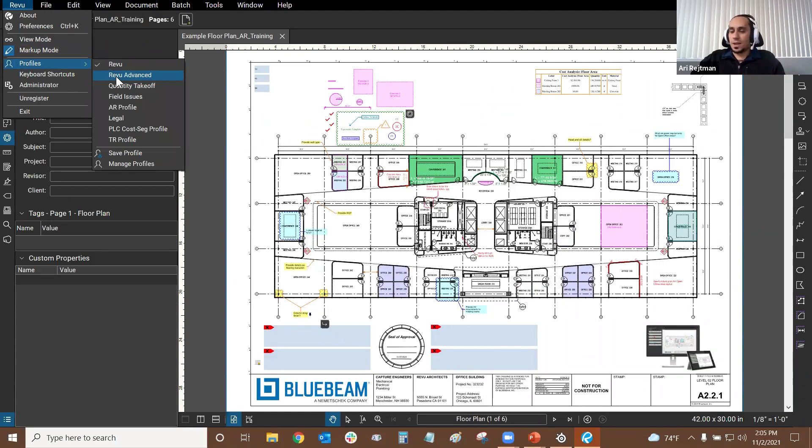We're going to go to the Revu dropdown, mouse over Profiles, and switch to Revu Advanced. If you're following along today, you can switch to this profile too, and we're going to make a copy of it right now because it's a great starting point for maximizing efficiency and improving your workflow. As you can see, just like my personal profile, this splits our functions, and we have some tools at the top of the screen.

I'm now going to recommend a few tools and show you how to customize them, especially by adding the Save As button right next to Save, up in the upper left. It's not there by default, so let's get our button for that.

Two ways we can turn tools on or off: one is to right-click next to an existing group of tools, such as these up here, and we see this list of tools. What I have turned on here is what I recommend. If you're going to be digitally signing and sealing documents, you can turn on digital signature, although it's not necessary. The rest of these are very important, including these four right here with document up to file. You can turn on or off certain tools you don't need, but most of these are very useful for almost everybody, so that should help you guys out a lot.

Now there are three toolbars missing here, and we can find them by going to the Tools dropdown, mousing over Toolbars, and now we see these three toolbars. The one that's not turned on by default that I recommend everybody turn on and leave on is the status bar. It'll provide you with buttons you can toggle on or off, giving you so much more functionality that the program provides, so you guys can turn that on.

While we're here, we have Customize at the bottom, so I'll click on that, and here's where I can add the Save As button. All I need to do is start from the upper left and work my way like a snake, you could say. So we're going to start here with Categories, and make sure File is selected, because Save As is found under the File category. The commands for File are all here, and here is Save As.

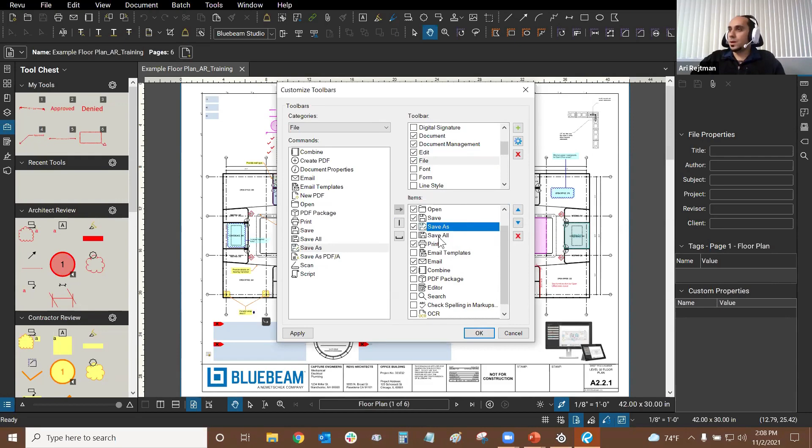Now all of the items I've turned on in my profile for file are found under items. I'll click Save As on the left side, click the arrow, select Save As, and use the blue arrows to move it up, right below Save. Now I have both, and if I wanted, I could also turn on Save All. That's how you customize it. I'll click OK, and there it is—I now have a floppy disk with a pencil icon.

So I can always save local copies if I'm working in studio projects or sessions when I need to. Excellent, that's the first step to customize this.

You can also move these groups of tools by clicking on the vertical white dots to the left of every group. Here's the one for this group, so I can move it left, right, or down. It's very flexible—I could even move it outside the toolbar area and have it floating if needed, which usually makes it more flexible, although right now it isn't moving out for some reason.

I know the side panels can definitely float. If I wanted properties on another screen, I'd just drag it out here, and now I have it floating like this. Although I like to keep track of my panels, so I keep them all on my screen. All right, now our interface is nearly done.

Let's turn on some preferences, and then I'll show you guys how the status bar works. So we go to our settings by going to the Revu dropdown and clicking on Preferences.

Starting from General at the top, having options highlighted, everything here is fine. Just so you know, you can change your theme—if the dark theme is too dark, you can always change it to the light one.

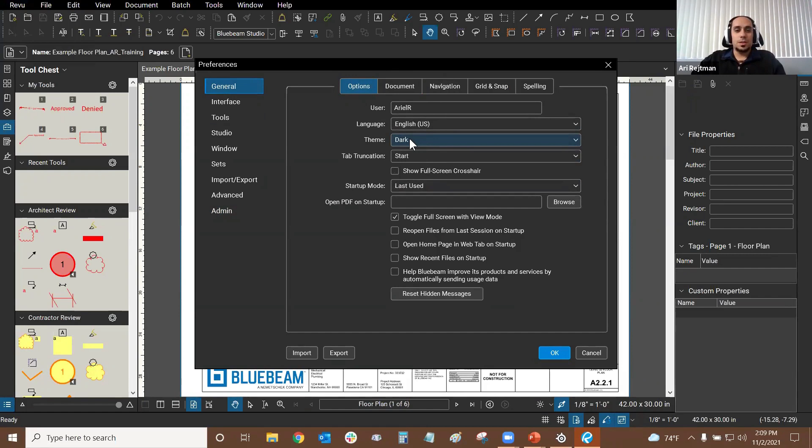I'd recommend everybody goes to Navigation and changes their sensitivity from 4 to either 3 or 2. That way you can scroll forward or back a little less each time, so you can center yourself on your screen more accurately. Having it at 4 seems too drastic—I set mine to 2 because I'm a little bit crazy.

Then if we go to Grid and Snap, you all might find this useful as contractors—you can change your grid spacing right here. This is very helpful when you turn on the grid, and you can turn on snap to grid, so you can snap to different parts of it, which I'll demonstrate when we get to the status bar. Here's where you change grid spacing along with other snaps you can turn on or off.

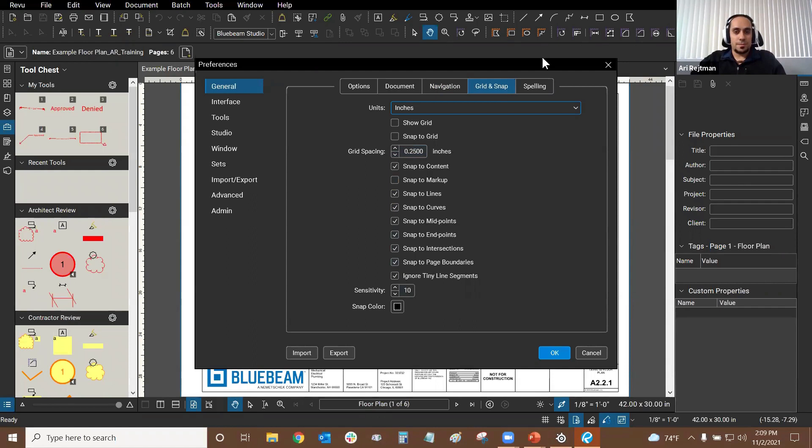Then if we go to Tools, we have two options that should always be on: reuse tools, and auto size text box and callout markups. We'll see how they work very soon when I get to the status bar, and we'll see how auto-size text box and callout markups works when I create a text box for you guys. They're really useful and will save you a lot of time.

Moving on, if you go to Studio and Servers, you can actually change your display name right here. All you have to do is sign in first, and then your display name will be here, and you can modify it if you ever need to. We're going to get into Studio in our third week, so I'll just make some quick comments about it here and there today.

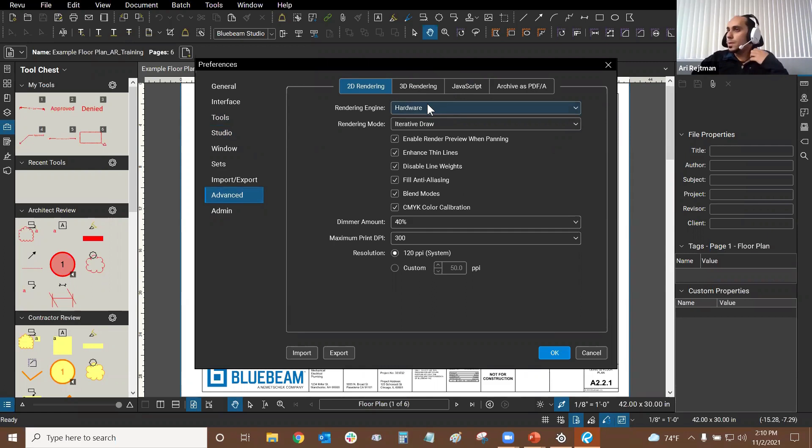Moving on, if we go to Advanced, if you're ever having bugs with the software, if you're not able to open a PDF, or if you're having color issues visually, you can change your rendering engine from hardware to software.

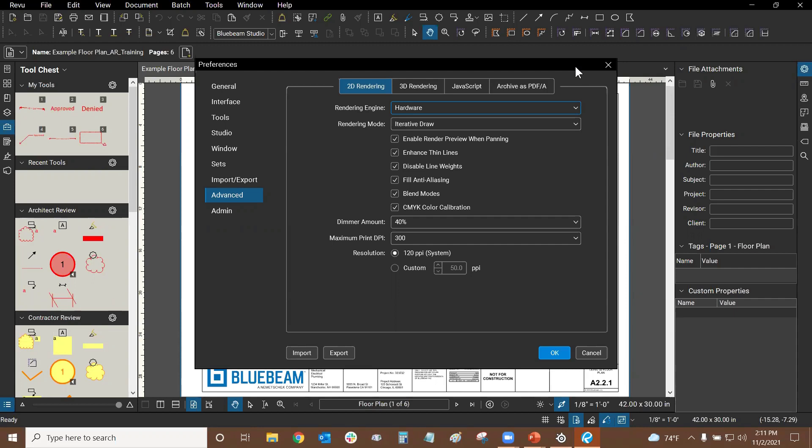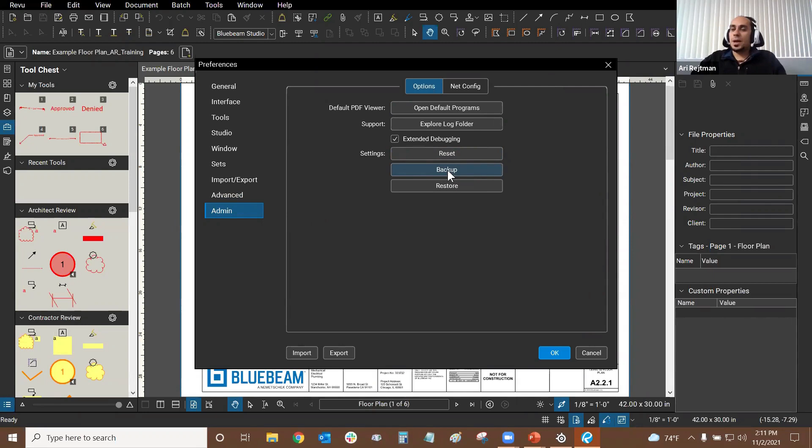When we're done with our settings, we'll click OK. Let me show you guys how you can share your profile with your colleagues very easily. Let's go back to Revu and Profiles, then Manage Profiles down here. Here's where I can make a brand new profile. Now that the Revu Advanced profile is my current profile, I can click on Add and create a brand new one. I'm not going to do that because I already have my profile, but now you guys know.

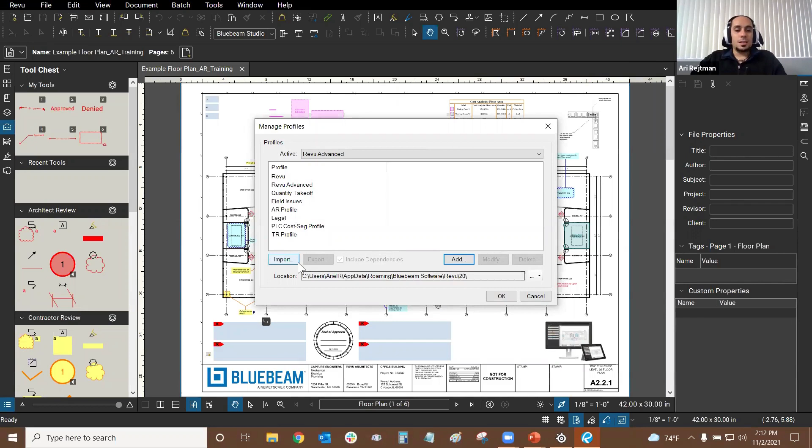The import and export buttons are here. So if I wanted to share my profile, I would select it in the list and click on Export. It's a small little .bpx file, really nice. You can put it on a USB drive, send it to yourself in an email. It's very small and handy to have.

All right, let me swap back to my profile. I'll just go to Revu, Profiles, and AR Profile. There it is, perfect. My profile is the same, like I mentioned. I just have all the tools turned on for visibility purposes.

Now besides profiles, let me show you guys a few other things. I want to talk about the status bar really quickly. Let me just go back to our PowerPoint really quick. Yep, interface customization and then comparisons. Good, I'm on track.

So the status bar, it's this bar all the way at the bottom of our screen. We can see the word 'ready' down here. And if I swap to another function, such as the highlight tool, it gives us some instructions on how to use the tool. So if you don't know how to use something, and this is your first time, select it and look on the bottom left. As long as the status bar is open, you'll see this text.

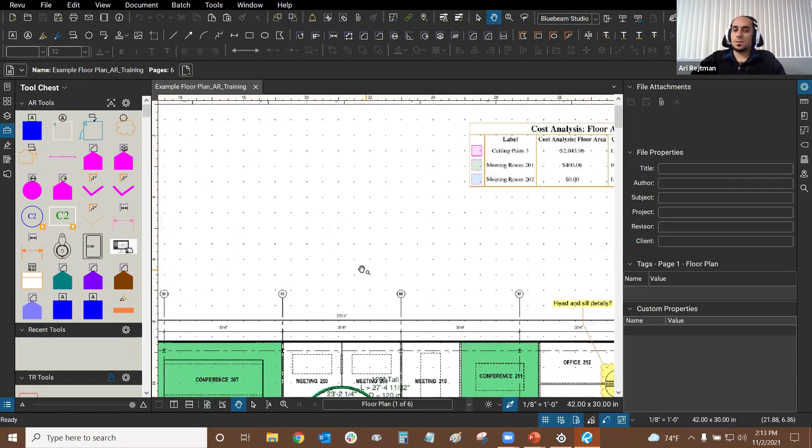Moving to the right of that text, we have Show Grid and Snap to Grid. Just like I mentioned earlier, we can turn that on. We have all these dots, and then we can snap to it here. So if you need to use a specific grid, you can change your grid spacing and preferences like I showed you, and then turn your grid on and snap to it as well.

For example, if I use a line right now and click next to one of these dots, I can draw from it to the other dots and snap perfectly. So it's quite convenient. Now I'm going to turn that off for today's presentation.

The third button here, I recommend that everybody turns on and uses most of the time. It's called Snap to Content. We're dealing with a PDF that came from CAD, and there are PDFs that come from BIM programs, Microsoft Word, PowerPoint, Excel, and all of them create vector data. Vector data is smart data. As I zoom in on any vector data, it keeps refreshing itself, so it looks really crisp and clear no matter what. So this is all vector data here, all the lines that exist on this page.

So I can actually use the line tool, and I can move my mouse on top of this data, and I can see a nice little box here. This box simulates some of the snaps that you're familiar with if you use programs like AutoCAD. For example, when the box is white, this is like the nearest snap. When the box turns blue, it's using a specific snap.

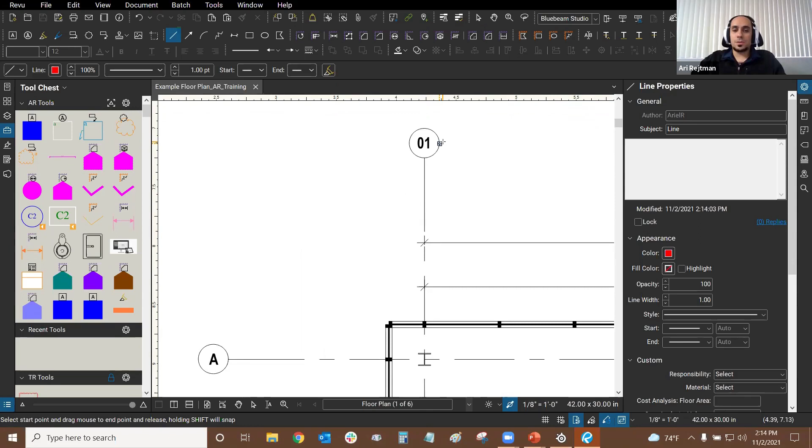So if I'm in the middle of a line, it's the midpoint. The end of a line is an endpoint. When it comes to circles, we have all 4 quadrants, and we also have intersections. So not as many snaps as you're familiar with in CAD, but close enough, and most of the ones that are very important for us when it comes to our markups and drawing in Revu.

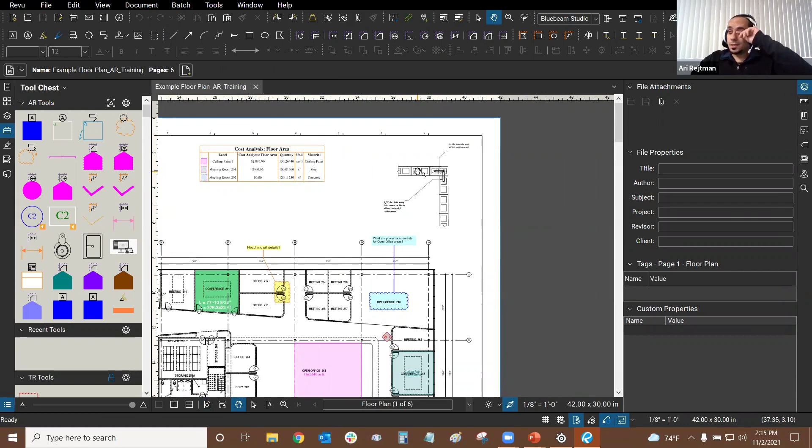All right, so that's how Snap to Content works. And the opposite of vector data is raster data, and that data is like an image or a scan. So anything that you put on a scanner bed becomes raster data immediately, even if it was originally a vector data drawing of a building or a site, for example.

So as I zoom in on raster data, it becomes a bit more pixelated and never really refreshes itself. This image right here is a good example of raster data, along with this image here. As I zoom in on it, it's very, very pixelated. So this is all raster data.

And we can't really snap to raster data, but you can still calibrate, and you'll have to guess as much as you can and be as close as possible to calibrating accurately. With vector data, you just snap, so the calibrations are almost always perfect.

All right, so that's basically our interface, and we've turned on our status bar, which is great. Let me explain the last few buttons in the status bar before we go into comparisons and overlays.

The fourth one allows us to snap to markup. So just like snap to content, I can now draw from the corner of a markup to the middle of one, for example. The issue with snap to markup is that there are all of these little guidelines here, so Revu wants to draw in relation to other markups. So I don't recommend that you leave it on at all times. I have it off most of the time, and I turn it on whenever I need it.

The fifth one is reuse markup tools. Like I mentioned in preferences, it's great to have this on because now when I draw a line up here, I can keep drawing over and over again. If I had this turned off, Revu would immediately deselect the tool from my cursor, and I'd have to click on the line tool again to make a second and a third one. That takes too long. Now, when I'm done drawing, because I have reuse markup tools turned on, I must press the escape key when I'm done.

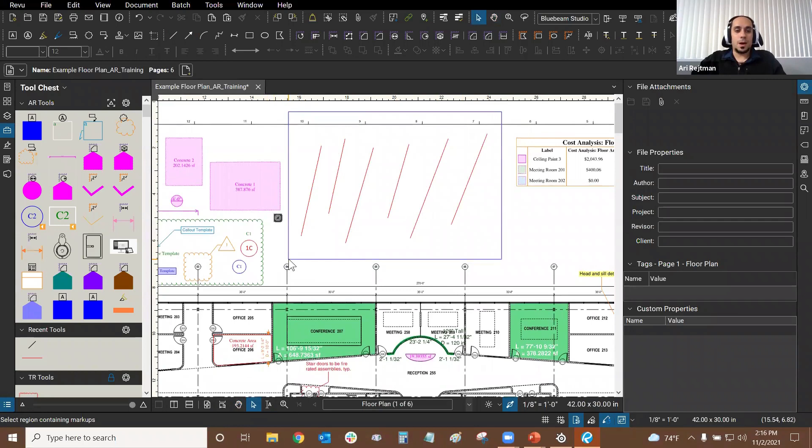If I want to select more than one markup very quickly, I can also use the select tool instead of the pan tool right here. Then I can click and hold to make a nice box around my markups, and then just delete them with the delete key. So there are many different ways to quickly select things, and the reuse markup tools will allow you to get used to using the escape key if you're not familiar with CAD or BIM programs.

Moving on, we have synchronized views, and this is going to help us when we do comparisons and overlays, because we'll be able to see both views moving together if one is zoomed in a particular area. We'll see how that works when I demonstrate comparisons and overlays, which I believe now is a good time for. So comparisons and overlays are really, really cool.

Let me show you our thumbnails list to show you what we're going to be comparing today. We're going to be comparing page 2, which is an old version of this floor plan, with page 3, a slightly newer version, and I also created some markups on it. So we're going to see how comparisons and overlays work with both vector data and markups.

So first we go to document, and then compare documents is right here, and overlay pages is right below it as well. Let's use a comparison first and see if we have enough information in the comparison to give a final consensus on what changed exactly.

So I'm going to click on compare documents. Here I'm going to make sure I'm using the correct file. Yep, that's the right one. I'm going to change my pages. I'll just click once and then type the number 2, because document A will be the old one. And then document B will be using the same PDF set, but this time it'll be page 3.

Now, if you're comparing two separate documents, then if you have both of them open, Revu will place document A and B in their order that they were opened.

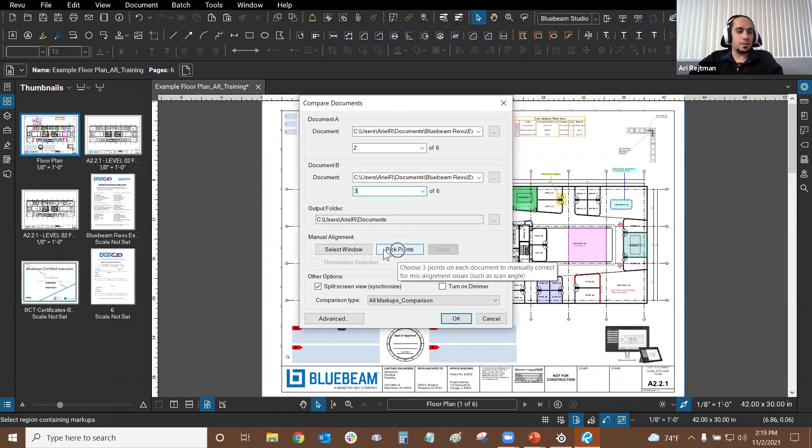Now we can go to advanced down here, and we can see different kinds of settings for our comparisons. We can create essentially four major kinds of comparisons: we can include markups, we can include flattened markups, we can include either or neither. And so that's why up here I have these four comparisons that I created myself. I usually just use the all markups one.

So it includes everything. If you're here and following along, you can change your DPI, or dots per inch, to 144 instead of 72. It'll make your comparisons a little cleaner and more accurate.

And down here, if you ever need to change certain information about the comparison, for example, what PDF the comparison will be created from: in this case, it'll be a new copy of document B, so a new copy of the new floor plan. We'll have all our clouds there, and the file name will be the same as our original, but with _diff at the end. We're going to make a brand new PDF.

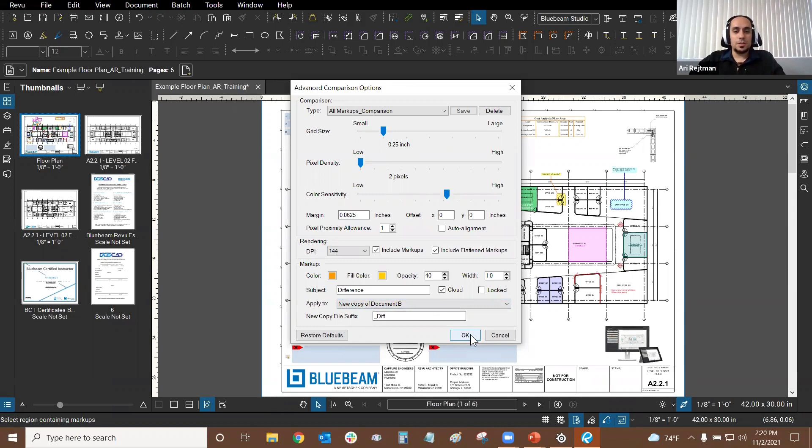So our settings look good. We can click OK, and then I'll click OK again. Once our settings are done, we literally just go to comparison, make sure our pages are correct, click OK, and the comparison takes seconds to make. Now we can see the comparison here on the left side.

So let's see what we can do with this comparison. On the right side, I'm going to choose page 2, because on the left side we have a copy of page 3. Now when I zoom in here, we can see some of the differences without having to use an overlay. For example, it's pretty obvious that a door was added in the new version of this PDF. So that's good to know, and that's what this revision cloud is referring to.

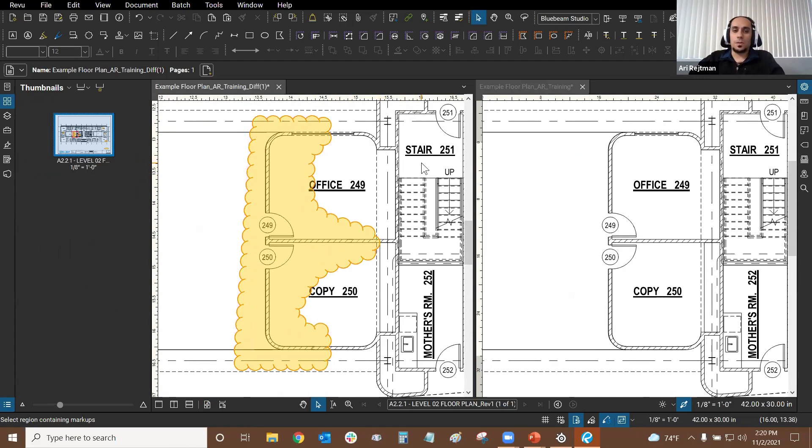Now, if we pan over here to these two offices, it's a little bit unclear exactly what happened with them. So the comparison doesn't exactly give us all the info we need. Let's use an overlay to confirm our assumptions.

So we can go to the document dropdown and click on overlay pages. It's also going to pick up on any PDFs that are currently open. An issue with this is that my comparison is open, and I do not want to use the comparison for this, so I'm just going to select it and use the red X to get rid of it.

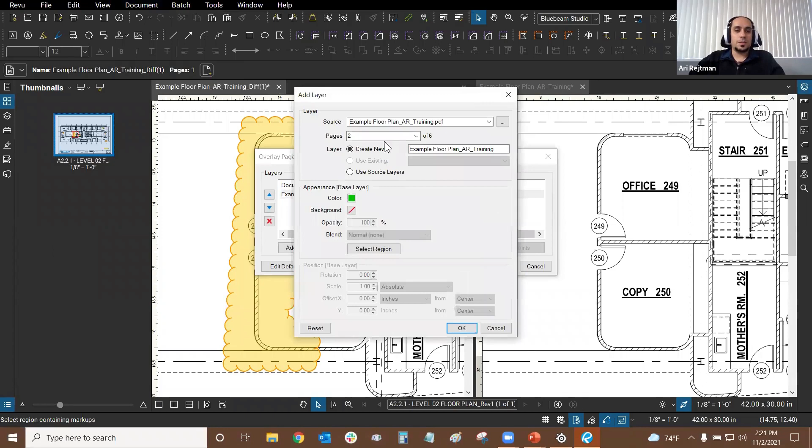Now it's chosen a nice green color, which is the default green, so I just want to change the pages here. I'll double click and change the page to page 3, that way green is new and red will be old. Let's get page 2 up here. We need to click on add in order to add it up there.

Now it still wants us to add the other document, the comparison document, as our second overlay page, and it doesn't even give us the option to use our other document, because overlays tend to be done with two separate PDFs. So instead, I'm just going to click on the square with the three dots and manually find my example floor plan. I believe it is right there, and then I'm just going to choose page 2.

It chose the color red automatically, a nice bright red, and this is a default color—it's this red right here. I recommend that you use the default green and the default red because they really work well together with overlays.

So now that I have them, I'll just reorder them so I can visually understand what I'm overlaying. I'll select this one and use the arrow. So now I have the old floor plan, it's red, it's page 2, and the new one is green, it's page 3.

Before we say OK and initiate the overlay, let's look at some settings we can change by clicking on Edit Defaults. You can change the different colors used automatically with overlays. So if I had a 3rd or 4th document, I could use blue and cyan as the next colors, for example. Then I can choose my blend here.

I recommend the darken default blend. It's the best one because when red and green are on top of each other in this blend, they make black, so it doesn't look like anything changed. In other blends, it makes them a bit muddy sometimes. So our settings here are fine as they are.

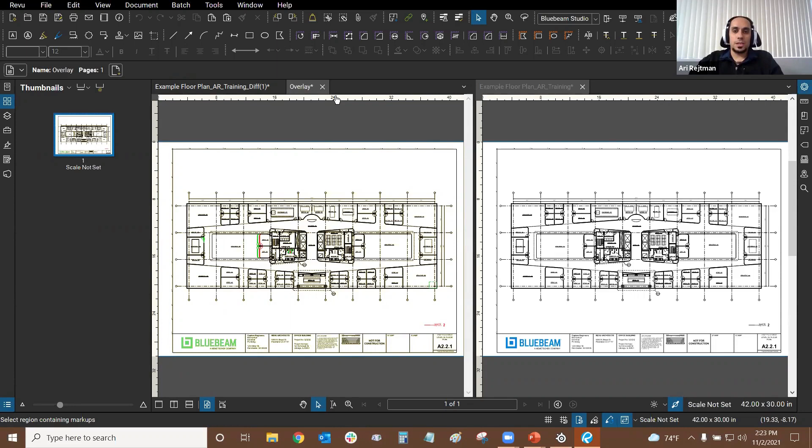All right, perfect. Now I'm just going to use my comparison to navigate. And I have a fun acronym for you guys to use with comparisons and overlays so you can understand their purpose: compare where, overlay what.

Comparisons are like our eyes, and it's very easy to see the revision clouds. So comparisons essentially tell us where something changed. Overlays, on the other hand, tell us what changed. So here we can clearly see that a new door was added and this wall was changed a little bit.

So that's great. Now let's go to those 2 offices and see if the overlay can help us a bit more. Yes, now we can see — if you guys remember the PowerPoint I showed you, I've taken screenshots of these 2 areas, and here they are. So we have our comparison on the left, the overlay on the right, and the overlay clearly tells us the offices got bigger.

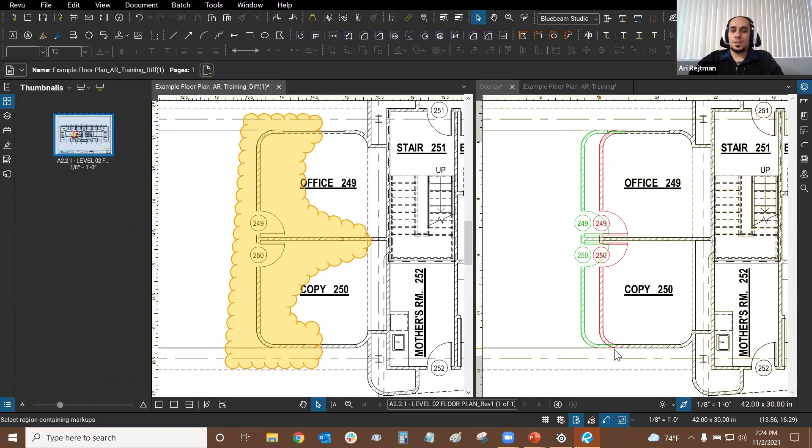So it's much easier to see it with the overlay, but the comparison is nice because it told us there was an issue here. If I was zoomed out, for example, I won't be able to really see all the different changes in the overlay, but with the comparison, I can just see them even if I'm zoomed out like this.

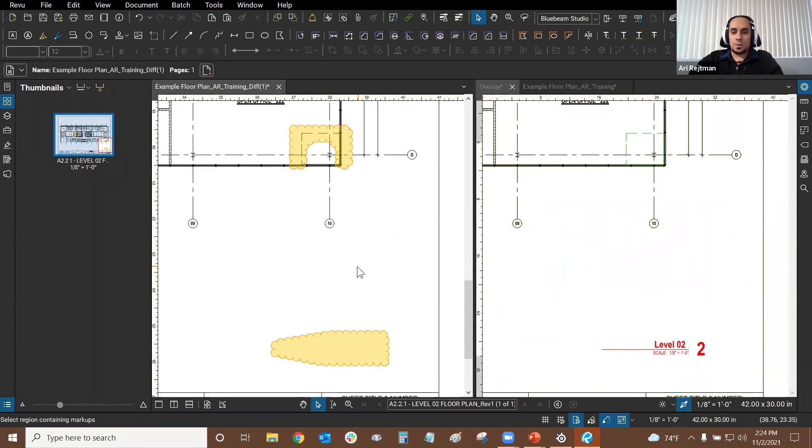For example, the restrooms changed here — we now have 3 stalls instead of 2. Moving on, we have some changes here that were made. This label is gone now, it doesn't exist anymore. And they added some lines here that I think are surrounding this beam.

And let's look at these markups that I created. The comparison found them — it easily made a revision cloud around both of them. But the overlay doesn't even show the markups. So this teaches us that the overlay does not include markups at all, while comparisons are excellent for markups.

So all you need to do to fix that is essentially flatten your markups to the page, and the overlay will pick them up, because anything that's flattened is just like any of these lines that came from CAD or BIM, for example. So flattening is the way if you want to use overlay. Wow, that was a fun little rhyme. Nice. All right, so that's comparisons and overlays.

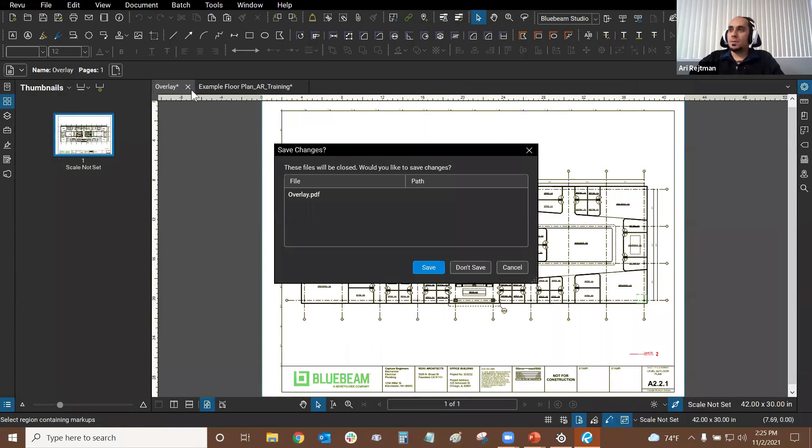Okay, great. So that was comparisons and overlays. Let's go back to our presentation slides. Let's learn about tools, and let me show you where you can find some more of them. So our tool chest, we can access it by clicking on the lunchbox icon right here. And I have all kinds of tools here.

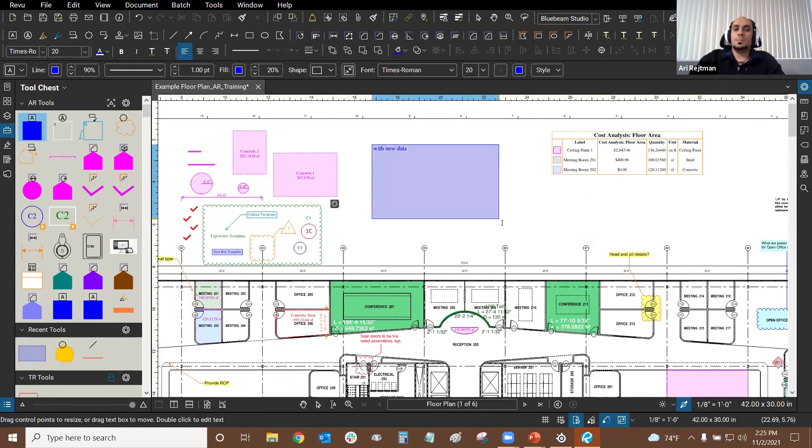I've swapped them into what's called properties mode. So right now, if I use this text box here, I can create a brand new text box with new data, but it still keeps the same blue color and all the other settings associated with it. We can go to properties and see them all right here.

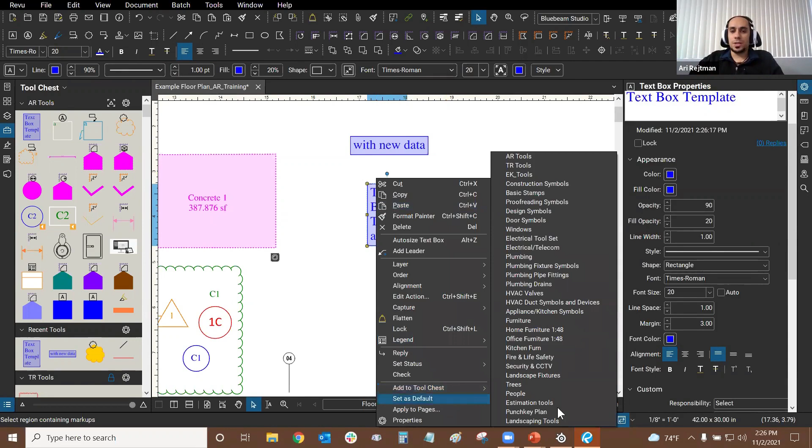But I work with clients who have to write things such as 'approved' or 'please revise' and all kinds of notes. So if you have any kinds of notes like that, you can write them ahead of time, then select your markup, right click on it, mouse over, add to tool chest, and add it to your group of tools.

That way you can have the best of both worlds: an exact word or phrase, and then you double click on your markup and use it in properties mode. So drawing mode is an exact carbon copy, and properties mode uses the properties. That's how we switch our tools.

For example, if I double click on all of my tools up here, I can swap them all into drawing mode. Then if I double click on them again, I can tell which tool I'm using based on the icon above them. So now I can see this is a text box, this is a callout, this is a cloud, and this is the Cloud Plus tool.

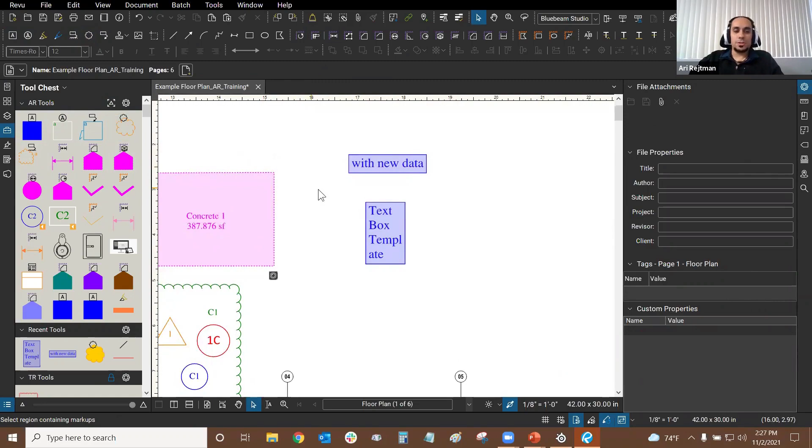That's basically how tools and markups work. I'm not going to go through every single tool today since we have plenty of tutorials and other webinars on that, but I do want to show you some cool things. Firstly, you can turn anything into a tool. I've actually done so with this sink and this toilet.

So how did I do it? Well, I went to these restrooms here and thought, I like these, I want to use them again in the future. So all I need to do is use the Snapshot tool.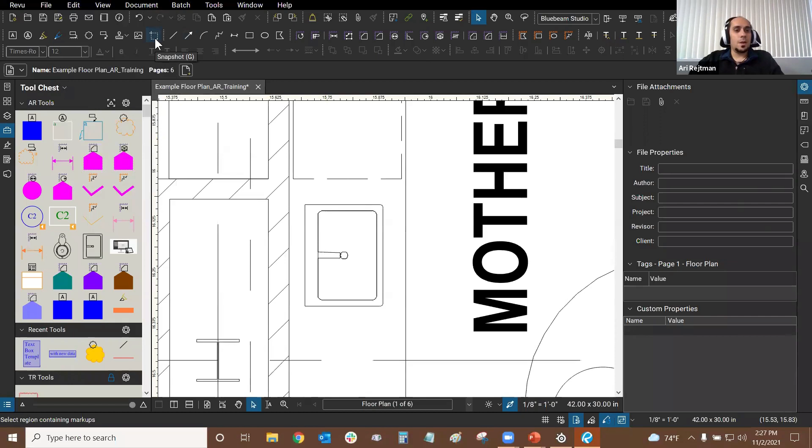I can find it at the top of my screen, and if you don't see it, you can go to Edit and Snapshot is there. You can also press the G key to access it. With Snapshots, I recommend going a little bit outside the object, so I'll go a little outside the sink, make a nice even box around it. The white space isn't too important, but it's still part of the snapshot a little bit.

So now I have it, but I can't click on anything yet because my blue box is still here. So I need to use my keyboard for the next part—I need to copy and paste my snapshot. I'll hold Control and press C, then hold Control and press V, and now my snapshot is pasted right to the upper right of wherever my cursor was. That's why the sink is right here. And there it is, I now have a sink.

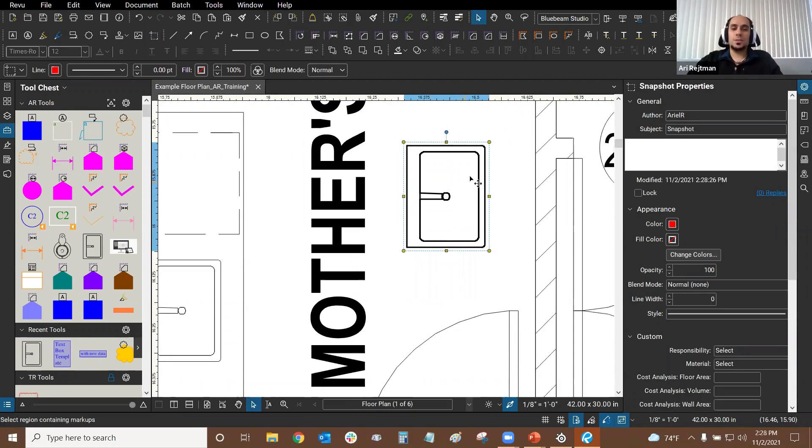Interestingly, while it's a snapshot, it looks like the line weights have turned back on for the sink. I actually didn't mention something I find very cool in this program. You may have noticed that a lot of my line weights in this document are all thin, actually the exact same line weight as each other. But is that the case? Is that how it was created in CAD? Well, no, of course not.

I've actually temporarily turned all my line weights off so I can easily snap to the center of my lines. I can turn them back on by clicking this button right here, Disable Line Weights, and you can find it under the View dropdown all the way at the end.

So I'm just going to click on it, and these are the original line weights of this drawing. So you don't have to go and ask CAD to print you a version without thick line weights if you need both versions. Now you can easily turn them on and off. You can do your measurements very accurately, and I can snap to this intersection here, which I couldn't see before. For example, here it's pretty much blocked, so I had no idea it was even there. And so there you go - that's how you can disable and enable line weights.

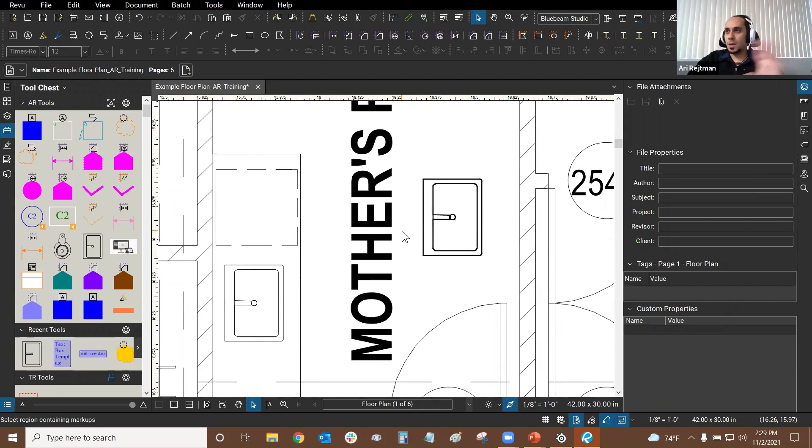I have my line weights almost always disabled most of the time. Some objects and text will act a little bit funky when you turn disable line weights on, so you might want to turn it off and then turn it on when you need it.

Anyway, I now have this snapshot that I created of the sink. Just like any image, I can essentially right click on it and add it to my tool chest - and I've already done so. Here's my sink, and I can use it over and over again. That's a great way to take any objects on a PDF and use them as a tool over and over again in the future, and you can build your tool library by doing so. A lot of people have done that already.

So I'm going to scroll down and show you a lot of tools that I found online. For example, I found some basic stamps and some proofreading symbols that are not really for contractors, but I'm a writer, so I like them. For you guys in particular, we have some doors and windows, some electrical symbols if you need to place certain objects or locate certain things, more electrical telecom symbols, and some plumbing. HVAC is useful - not as much for you all, but still good for you to know it exists. Some furniture, some spacing, some kitchen stuff. Fire life and safety is quite useful - I had a client that specializes in that, so they found these tools and love them. Then we have security and CCTV that we found, along with some landscaping.

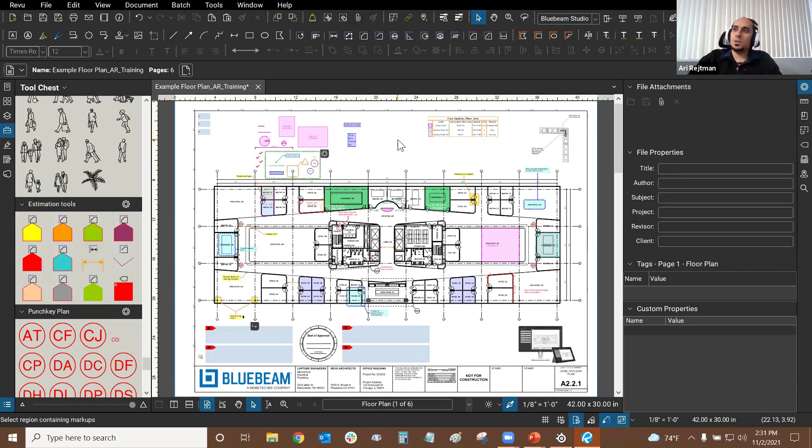This is much more relevant for contractors in your discipline - we have some landscape fixtures, some trees, some people that we can place outside, and of course some lovely estimation tools. These are essentially area tools that have certain materials and certain costs associated with those materials, so when you use them they'll automatically calculate the cost of tile, carpet - this one's another kind of carpet, and we have so many different kinds, and so on and so forth. Here, this one's brick, for example, AstroTurf. So there are many different areas you can create that have different associations, and I'm going to show you guys how that works next week in our quantity takeoffs webinar, because I think that will be quite useful and relevant for all of you.

The last group of tools I found that I think will also be relevant for you all are these punch key little circles. Essentially you can take these and place them on your drawing - I also have some more trees at the end. Now, what if you wanted to make your own? What if we're missing a certain acronym or some letters here? So I can take one of them, place it on my sheet, select it, and make sure that properties is open.

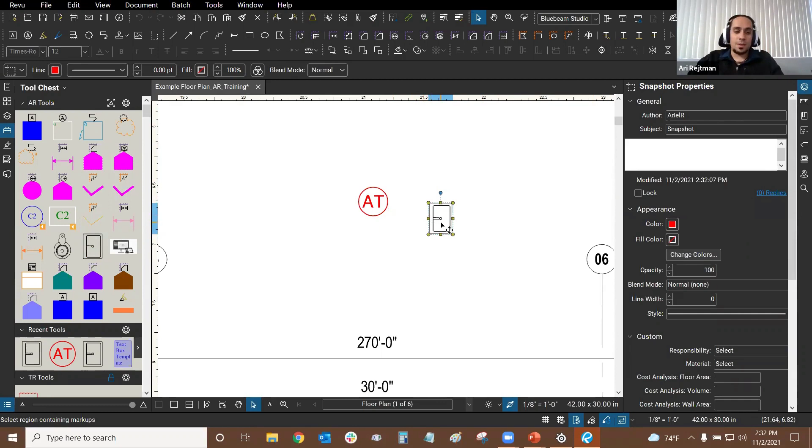Here on top of properties it says group annotation. This is actually a little bit different from that sink I showed you earlier - that was called a snapshot. So group annotations, snapshots, and images tend to be similar to each other, but they actually have very specific differences. Snapshots are similar to images, but you can modify some of their settings in properties. Images you can't really modify too much, except for opacity, basically. And a group annotation is much easier to manipulate because it's actually a combination of markups that form one markup - so I can right-click on top of this and go to ungroup.

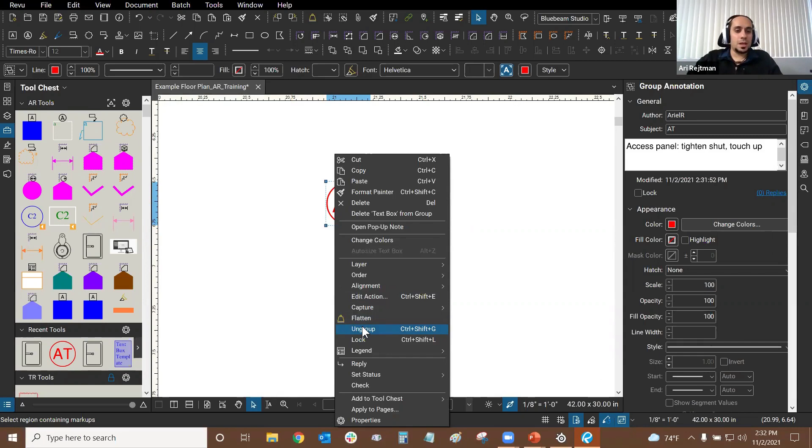And if I was to do this with multiple lines selected, instead of ungroup, I would see group. So I'm going to click on ungroup. Now these are back to being individual markups.

I believe it just involves one text box and one, let's see if I can click on it. Is it going to let me? There it is, one circle. And this is very good because look at this, the circle even has some text associated with it in properties. It's an access panel. Look at that.

You all probably know more than I do about what these acronyms mean. But what if I wanted to change it? So I'm just going to be silly and change it to my initials. Why not? Maybe I'm a special punch key symbol. So there it is, I put it to AR. I'm going to move it down.

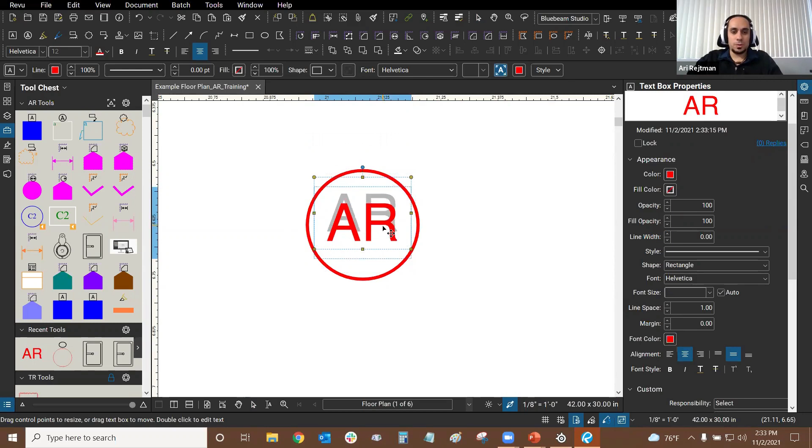If I want to keep it straight down and I don't want to eyeball it, I can hold the shift key, and you can do this with almost all of the tools. You can hold shift and it allows you to draw straight lines. For example, with the line tool, I can draw a straight line horizontally, diagonally, and vertically. So I'm holding shift while moving my cursor. If I let go of shift, then I can just draw free form like this.

Anyway, I've now modified my little punch key. I'm going to select both markups by holding shift. Most of the time you would hold control in most programs to select more than one thing, especially in Windows when selecting more than one file. But in Bluebeam Revu, control works a little differently, and shift is more for selecting more than one markup. So now I have them both selected because I can see both groups for both markups.

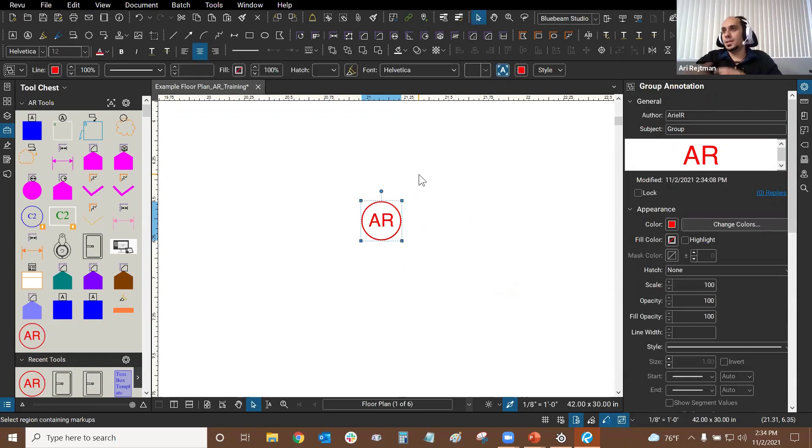I can then right click and group, and I now have a group annotation once again. And I can save that to my tool chest. And there it is. So that's how you can basically create your own markups from different shapes and symbols in this program. You can combine lines with text, as you just saw, along with many other different things. All right, great, so that is essentially tools in a nutshell.

Now, where did I find all these tools? Well, I thought I had a web browser ready for this. Let me see, I will get it ready for you all right now because I have this saved. It's a really, really nice part of Bluebeam's website. Here we go, so you can go to

support.bluebeam.com/revu-custom-libraries. And then you can scroll down. Everything is on one page, all 4 of these categories here. So let's click on tool sets, and then we can see that we have many different disciplines up here.

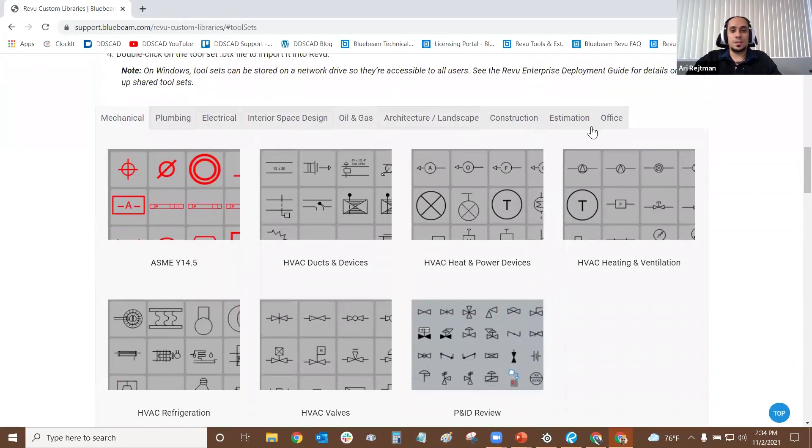So for example, if we go to architecture and landscape, here are the people and trees that I showed you guys earlier. And then construction, of course, will be very useful for you all. We have so many more different sets of punch keys for different disciplines, so carpentry, cleaning, electrical, et cetera, et cetera.

We even have sequences and actions, which you can make your own sequences, but we have some predefined sequences here that are quite nice. So now you know that there's even more tools than I showed you, and they're all here. Once you download them from here, just double click on them in a folder, and essentially Bluebeam will recognize them and ask you if you want to import them. You say yes, and you're done. And so that's how these tools work.

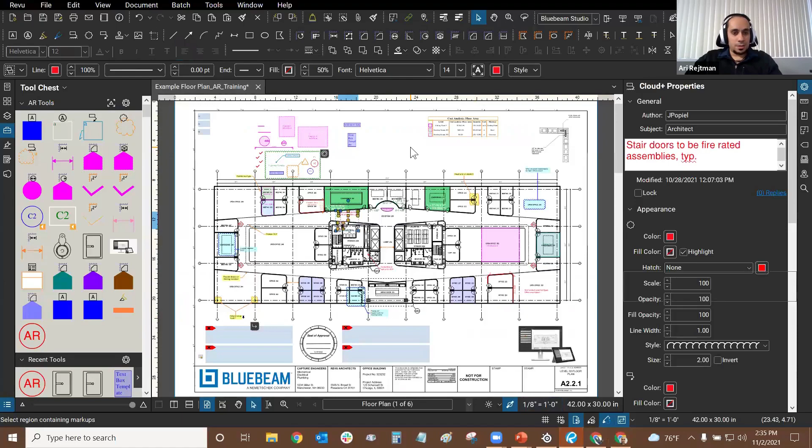All right, great, so let's go back into the program, and let's actually go back into our presentation and see if I missed anything. All right, yes, I talked about that. Let's get into visual search and hyperlinks. I think that'll be a great way to start to end off this one. And I think we'll have time for security and flattening as well.

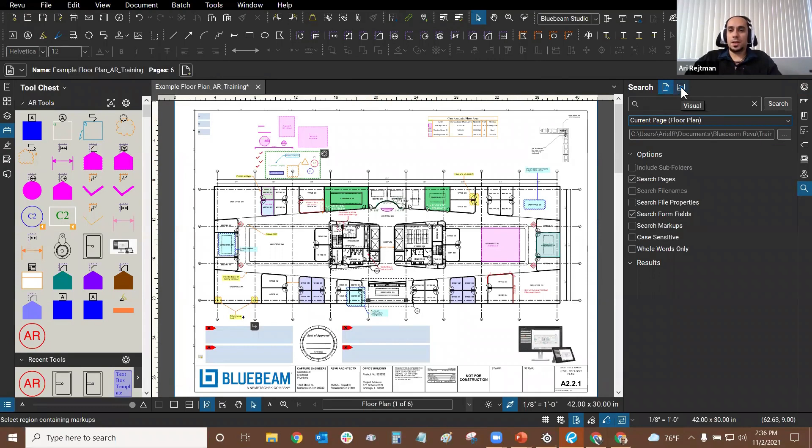So how does visual search work? Well, you can access it by going to this little magnifying glass right here. And you have search at the top. This is for text, and then this is for visual up here. And they're similar to each other in terms of their options. Text is pretty obvious: you can type any text here, and it'll look not only for markups if you want it to, but also for any text that's been flattened to the page.

Anything that came from CAD, I could search for these storages, for example, or I could search for how many offices we have. That could be quite useful if I'm doing some quantity takeoffs in regards to how many offices we have on the drawing.

If I go to visual right here, then this is the fun part. This is where we can search for actual objects instead of just text. I like to use these sinks as an example. I'm going to use get rectangle and make a rectangle around the sink, just like I did with Snapshot. Same concept here, except when I'm done, I now have a preview up here, and there's no restrictions.

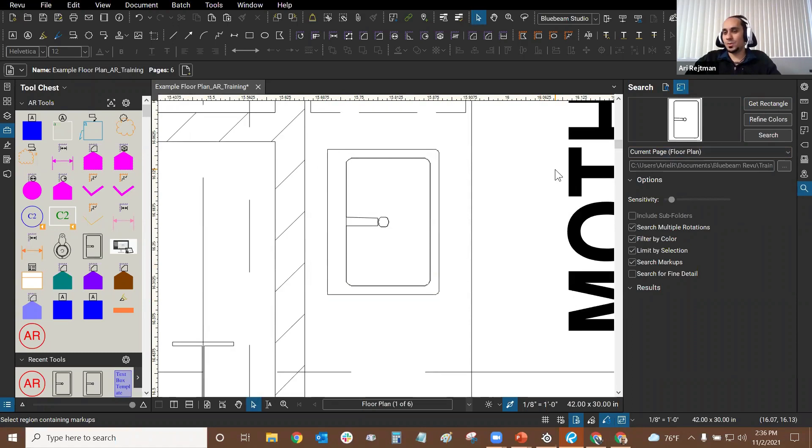So I now have this preview. Everything's looking good. I need to check my options and my sensitivity before I continue, because I now have some questions to ask myself. Do the other sinks on this drawing have lines going through them? And the answer is yes. We have this grid line going through this one, through the whole thing, and this grid line is going about halfway through. So technically, all three of these sinks are different objects.

We can circumvent this issue by scrolling down in the sensitivity area right here. Now that my sensitivity is set a little bit lower, I'm going to find any sinks that have a few extra lines associated with them. And I have an option here that says search multiple rotations, so this is not a problem. I can search for sinks in any orientation, even if they weren't perfectly 90 degrees.

So now I'm ready, I'm going to click on search. My percentage is going to increase down here. Before that, I could have also changed what page I'm searching on, so I'm just searching on this page, not all 6 pages in my PDF set. Now we have 5 results found, and if I'm expecting that amount, then it looks like my search was good. If I got too few or too many searches, I would just change my sensitivity bar slightly and do another search.

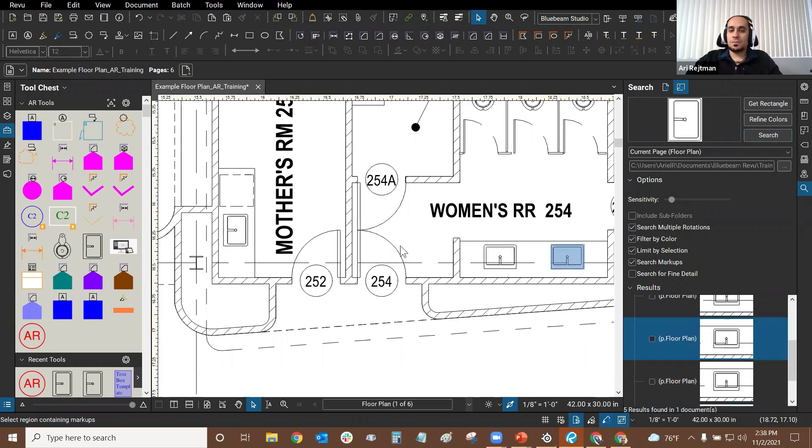So now I have my options here. If we select them in the list, they highlight in blue, and that's it. They don't center themselves on the screen. If they're not on the screen, then they're just going to be on the edge of the screen. The screen will navigate towards them, but it won't center them, so we can't really use the objects right now.

The best thing to do when you get your results is to select them all at the same time by clicking on this box right here, and then click on the lightning bolt icon. This is called check options. We can click on this, and this is where we can get a lot of power. We can actually create hyperlinks with all these sinks.

So if somebody clicks on the sink, it can take them to a website, it can take them to another page, it can take them to a separate PDF. Maybe you included multiple PDFs in your submittal, for example. So it's really, really powerful.

Let me show you how hyperlinks work. Now, before I do, I'll let you guys know you can also apply count measurements very quickly to all these objects. You can highlight all of them very quickly. Highlighting is my favorite thing to do because it turns them all into a markup that you can quantify in your markups list. So if you do want to quantify them and hyperlink to them, I recommend making a hyperlink and highlighting them at the same time.

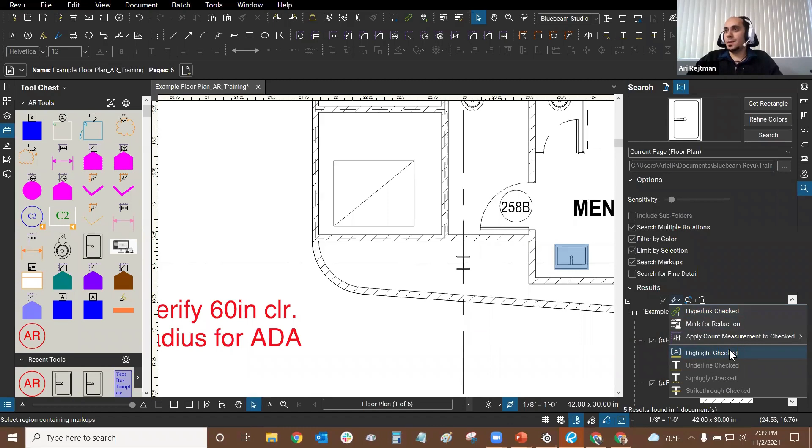So let's do a hyperlink first. Now, this is the hyperlink dialog box, which we call the action dialog, and now we have so many different options for hyperlinking. I can jump to a specific page in my floor plan. I can also go to a place, and it could be a predefined place. I've done this before, so I already have 4 places that I've used before, and I've given them all names.

And if I wanted to make a new one, I can just click on create, but for now I can use one of these existing ones. Then I can go to a space. A space is an actual asset in Revu that people use usually for rooms, but you could use this for anything. You can just make a rectangle or any shape around a certain area, and that can be a space, so you could use that if you wanted to. You can go to a specific snapshot. Then here's hyperlink, so this would lead to a website, and open is here too, so I can open a new file from here.

So I'm just going to keep it simple. We're going to jump to a place. Let's try the toilet RFI one and see what happens. We'll click OK, meaning all the sinks automatically have the same hyperlink. When they're not selected, the hyperlink is usually orange. This one is brown for some reason - ah yes, because it was selected. So what I've done is I've actually changed my hyperlink properties.

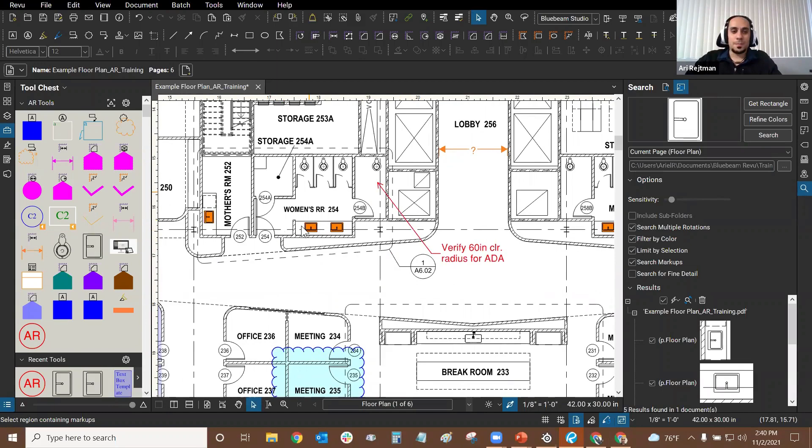So how do you do that? Because you can't click on a hyperlink - if you click on it, it takes you to where you're located. So to modify a hyperlink, all you need to do is right click on it, then leave this dialog here and go to properties. It's still highlighted and we can see the grips around the hyperlink.

So this is great because here is where I can change my color. Usually hyperlinks have no color, so if you wanted to, you can uncheck visible and that way your hyperlink wouldn't really exist. Everything would look normal and nobody would know there's a hyperlink there. So that's why I changed it to have a color, just so it's easily visible and you can tell there's a hyperlink there. So I'll right click on this again.

Whoops, I accidentally hit appearance. Let me make sure I uncollapse that. I'm going to make it visible - it remembered its old color, and that's perfect. So that's hyperlinking, that's how we create the hyperlink.

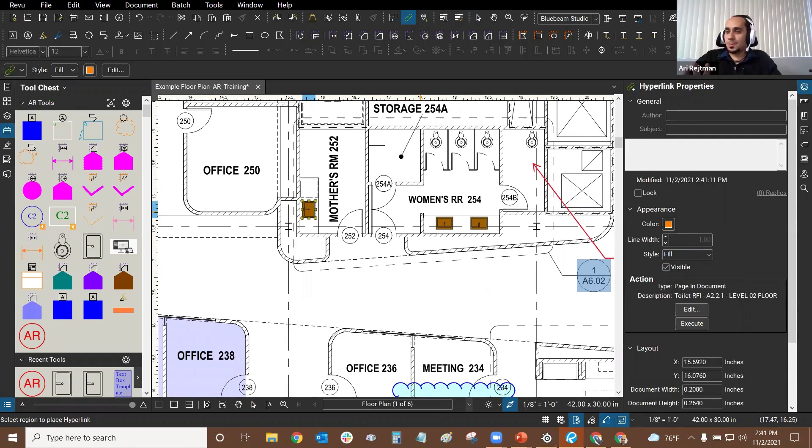Now let's finally use it and see where it leads to. So I'm going to click on the link. Looks like it took us to, we can see down here, page 3. And I made a little place right over this markup here. So that's perfect, this hyperlink led to right there. So that's how you can use hyperlinks - it's really, really nice and powerful.

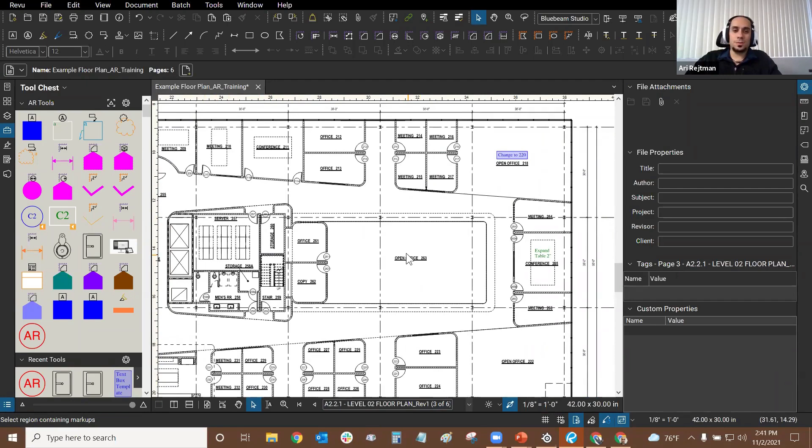So I'm going to go back to page 1. There's a few ways I can do that - I could click down here once, type 1, then enter. That's a great way to use keyboard shortcuts. Another way is I'll show you guys a really cool tip about navigation. Since this is our intro class, it's good for you guys to know how it works.

When you open a document that is in landscape, and this happens to be a 42 by 30 inch sheet, then Revu is going to use one full page. It's the setting right here. That means when I use my mouse wheel, I can roll it forward and back and zoom in and out, which is great. That's usually my preference whenever I'm navigating any document.

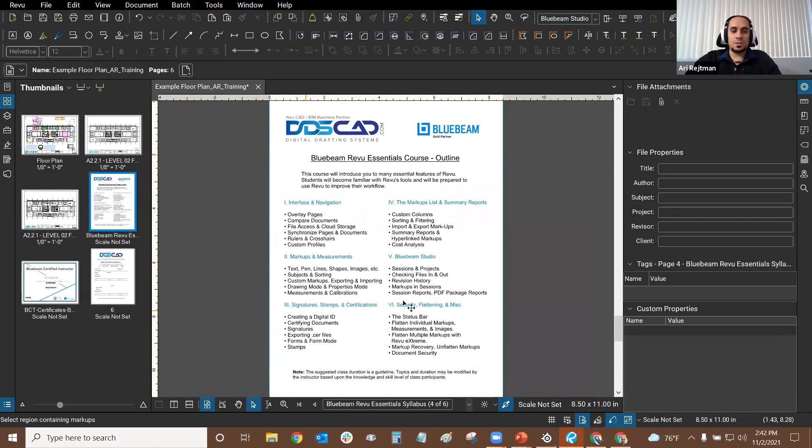Now I'm going to go to my thumbnails list and switch to one of these 8.5 by 11 pages - let's go to this, our syllabus for our training course. By default, if Revu is opened and this was the first page, or the last page left open, then it would swap to scrolling pages automatically, and my mouse wheel now goes down and up instead of zooming in and out.

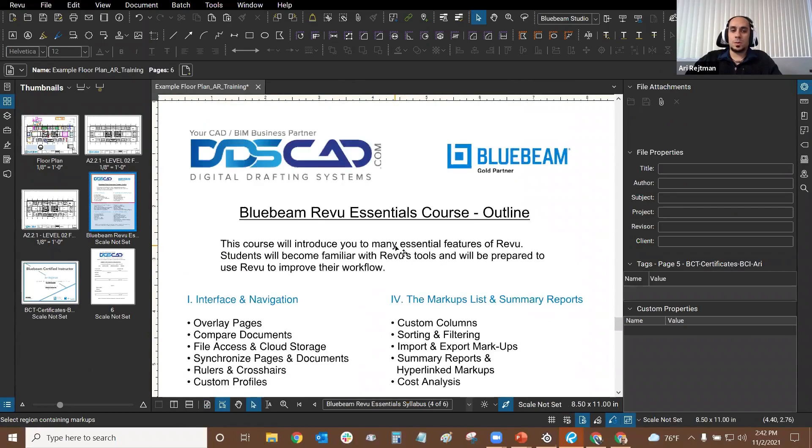What's nice about this is that if I keep scrolling, I can scroll to the other pages seamlessly - technically everything is in one view. Now I'm going to prove that to you. We can do that by holding the control key. Now I've started in scrolling pages, so when I hold control and zoom out, I can zoom out like usual and everything is now visible to me. I can see all my sheets in one view, which is great.

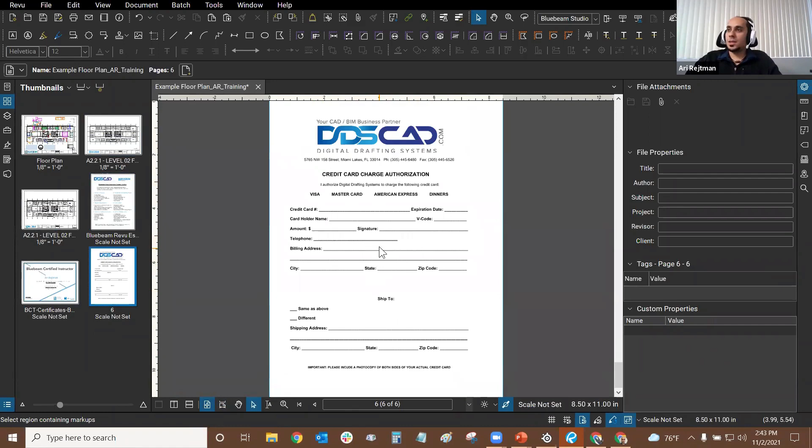Now what if we did the opposite? What if I started with one full page and then held the control key and rolled my mouse wheel? Now I can quickly flip between my pages very seamlessly. I don't have to click on anything, I don't have to type anything - I'm just holding the control key with my left hand. So this is a great way to basically navigate between pages.

You don't have to go to thumbnails and click on your page. Instead, the control key is a really nice way to swap between sub-functions of almost every single function in this program. So that's how control works, and that's the best way to navigate.

All right, great. I think we've gone over almost everything. Let's get into security and flattening because we are almost ready for questions. This is perfect timing. I mentioned flattening a little bit earlier about how markups could be flattened in order to be used in overlays.

How do we flatten markups? There are actually two ways to do it. I can take any markup, select it, then right click on it and flatten is right here. If I do this, it's a semi-permanent action, meaning that if I close my document and save it, this markup is flattened forever. Now, I don't necessarily want to do that.

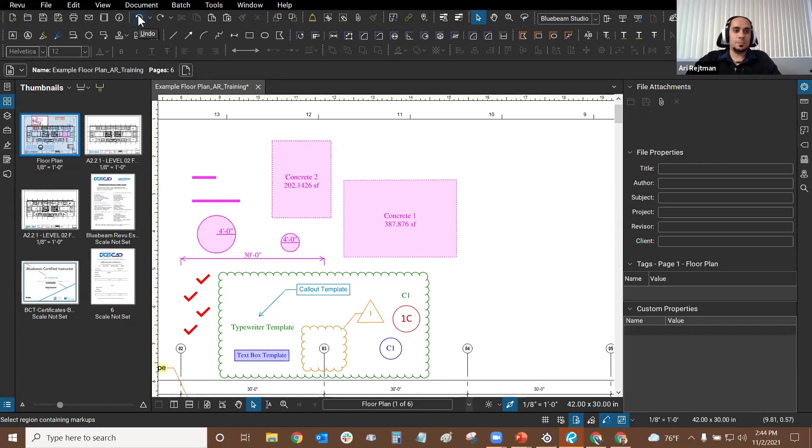The only way to undo this is to press the undo key while I'm still in the file. Let me press it a couple times, maybe a third time. There it is, I have my markup back. So that is a very quick way to flatten things.

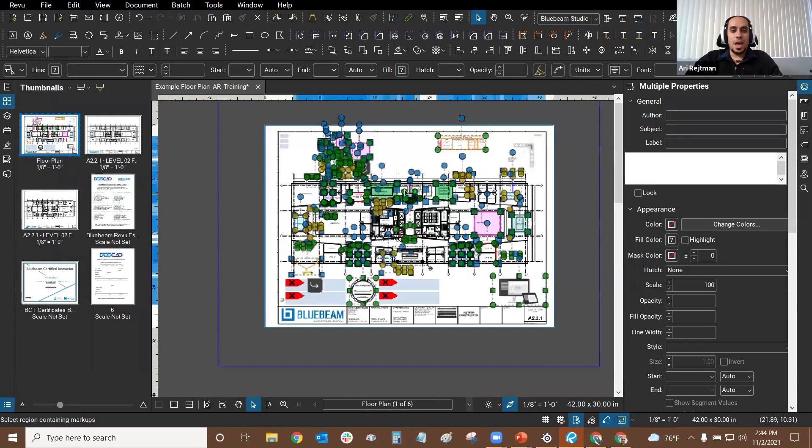If you're not expecting to need to unflatten something, just quickly highlight everything. For example, if I am about to give a submittal, I can just make a big box over everything. Make sure you use the select tool in order to get that box, and then every single markup is highlighted. As a result, I can just right click on one of them and flatten them all at the same time. That's a great way to quickly get a submittal ready to go.

Before doing so, I recommend that you make a copy of your working file so that you have your working file and your submittal as a separate entity, just in case. Now, if you want to use the same file and you're also not too worried about people being able to unflatten your markups, then you can go to the Flatten Dialog.

Two ways to access it: by going to Document and Flatten right here, or if you have the Flatten icon in the top part of your bar, like I have right here. There was a second one I had, but I actually turned it off using the customized tools I showed you guys earlier. If I click on this Flatten Dialog, this is much more sophisticated.

Now I can flatten more than one document at the same time, and more than one page at the same time. I can do that by going to Add down here and opening more files or a folder filled with PDFs. It's really, really nice.

Then under Options, I can choose what kinds of markups I want to flatten. So if I just wanted to do images, I can uncheck everything and then just check images, for example. I'm just going to check everything on again.

Then here we have Flatten, and it's going to ask us if we want to do all markups. If we have filtered markups, we can basically avoid flattening them, and we can filter with the markups list. I'll show you guys that next week when we get into quantity takeoffs. If we select markups ahead of time and then click on the Flatten button, we can use currently selected markups, so we can just quickly flatten whatever we selected. That's a very nice and quick way to do it without having to flatten everything in the document.

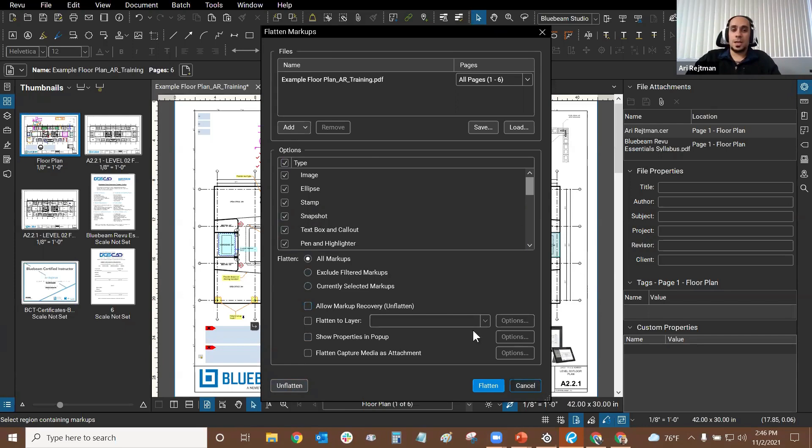All right, so that's how flattening works, and that's flattening in all of its sophistication. Now, let me show you guys how security works.

But before I do, I need to take a little drink break. I'll be right back for a second.

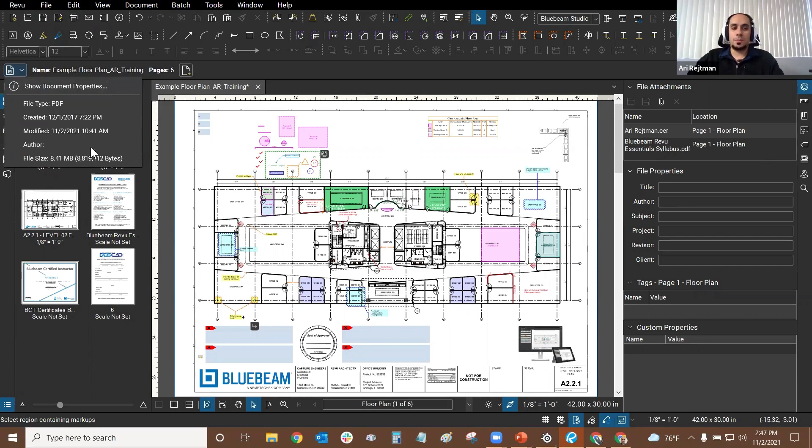Okay, good. So let's go over security. How can we access it? We just need to go to Document, and Security is right here. Another quick way to access it is, if you don't have a markup selected, you have this bar below our shortcuts up here, and there's a button called Document. You can click on it, it's a drop down, it gives us information about our PDF, and we can click on Show Document Properties. This dialog contains 4 tabs at the top, including Security. That's the other way to get to security. So you can go to Document and Security, or just click on that button.

Before we get into security, General allows you to have some pre-populated information. So anytime I make a markup, if I wanted the author to be my name, I can just type my name here, and that would automatically be put in the author column every time I make a markup. It's really cool. This will actually change the author of this PDF, and the author in future other PDFs will not be changed. So you'll want to do that per document.

So then we can go to security. And here, everything is allowed by default because there's no security settings. If you want to change your security settings, you can do so only before signing a document. So change your security and then sign your document if you want to include specific settings. We're going to click on Change Permissions, and here's where we can modify it all. I can do this for more than one document. Just like you saw earlier, we have that same dialog box at the top where I can choose my pages and add more PDFs.

Then I can require a password just to open the document, and also require one to print, copy, or edit the document. It's so flexible, I can basically only allow printing. For example, I can uncheck allowing changes, no copying text or graphics. And you know what, I don't mind if somebody extracts content. That is very important to leave on if I'm expecting somebody else to need to measure on my document, because measuring is similar to markups and similar to making changes. So if I don't allow changes, then nobody can make measurements in my document.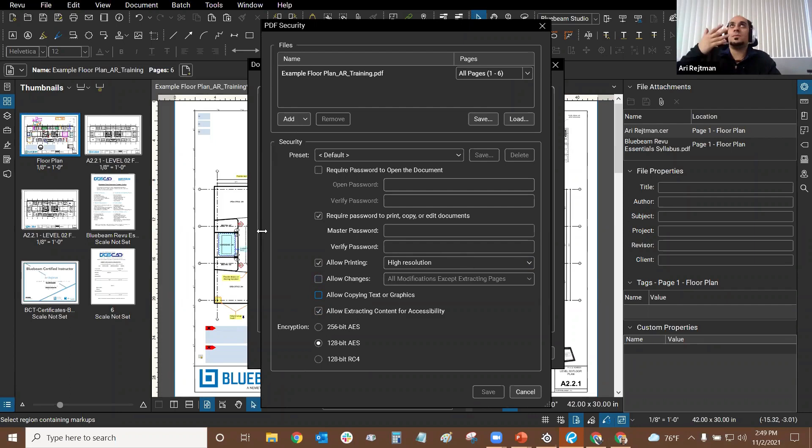So after I sign something, if I'm submitting, for example, to a municipality and they need to measure and check some things before they put their seal of approval, then I need to allow for extracting content. And when we go to sign, we can also allow for markups, so we can be flexible whenever we need to. I recommend everybody uses the middle encryption method, the 128-bit AES. I did some research and it turns out that one is more modern and the most secure. So just to let you guys know. All right, so that's how security works. Once you do that, instead of everything being allowed, some of them will be restricted, and you can modify that per your submittal.

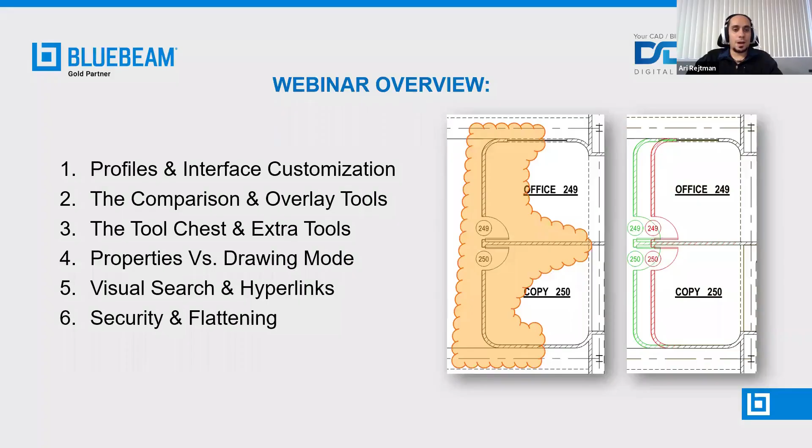So Gus Rowley says, we use Bluebeam every day, some files are too large and take forever to render, how can we speed this up? Oh, I'm so glad you asked because I learned about this 3 weeks ago in a conference. So all you need to do is go to your preferences, go to the Revu dropdown and click on Preferences. Then under Advanced, something I didn't mention and should have mentioned earlier, I'm so glad you asked this question, is our rendering mode. So you guys are all contractors and you're dealing with surveyors, engineers, and architects.

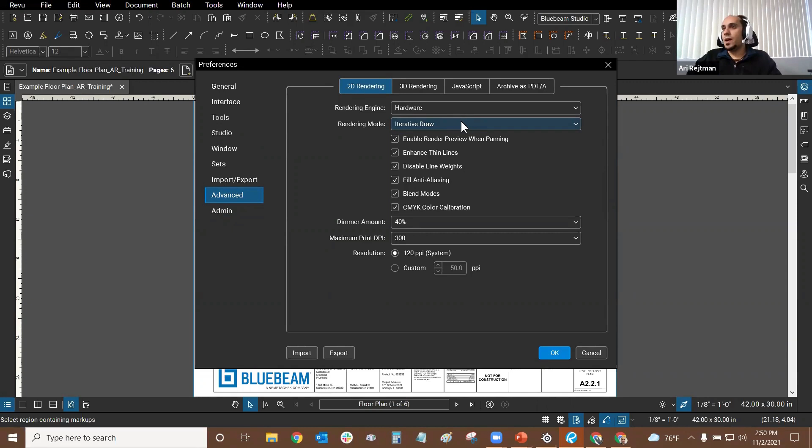And sometimes you're going to get files, especially from surveyors, that are massive, and they have maybe tons of markups from the surveyors too, or even assets from CAD that turned into markups in Revu. So what you can do is go to your rendering mode and change it from iterative draw to wait for completion.

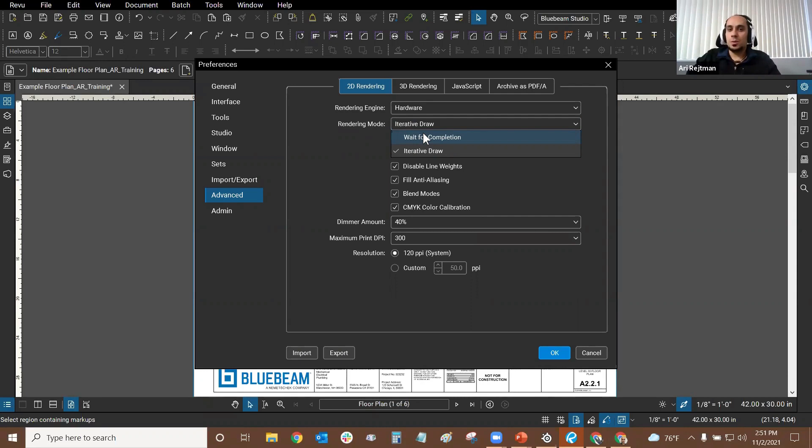Iterative draw tries to load almost everything in your PDF at the same time, so if you have a powerful computer, it'll make things load a little bit faster. Wait for completion will load something as soon as you navigate to it and it's visible on your screen, so it allows things to load faster, but when it comes to pixelation, you'll notice maybe a 5-second delay on how fast pixels and other things load. If you're moving across your document very quickly, you can see the difference between wait for completion and iterative draw. So you can switch it if you need to, and that should help with really big documents.

Let me show you one more tip, because I'm really glad you asked that question, Gus. What you can do is go to, I believe it's under the document dropdown. Let's see if I remember where it is. There it is, reduce file size.

I made a tutorial on this on our website, which I'll give you guys a link to a little bit later. So we can reduce the file size of our PDF, and it's very simple, but it can also be extremely complex. We have a quality slider, it only has about 5 settings here, so you can change it to whatever you need, and that will help modify the size of your file. Then you can go to edit right here, and you can also create new presets.

I actually have a reduce file size tutorial preset that I made, so I'm going to select that and click on edit. It's going to analyze the file to give us information, and now we have this awesome reduce file size dialog. It is very, very complex, but don't be overwhelmed—it's very easy to use once you understand how it works.

You can basically turn on or off certain assets and even get rid of them altogether when reducing the file size, so you can delete objects by using this. When it comes to using full color, if I change it from 72 dpi to—oh, it looks like that's lowest, excuse me—but if I change it to something else, then it'll help. Now we can see down here that we have an estimated file size reduction of 9% with the current settings that are turned on right here.

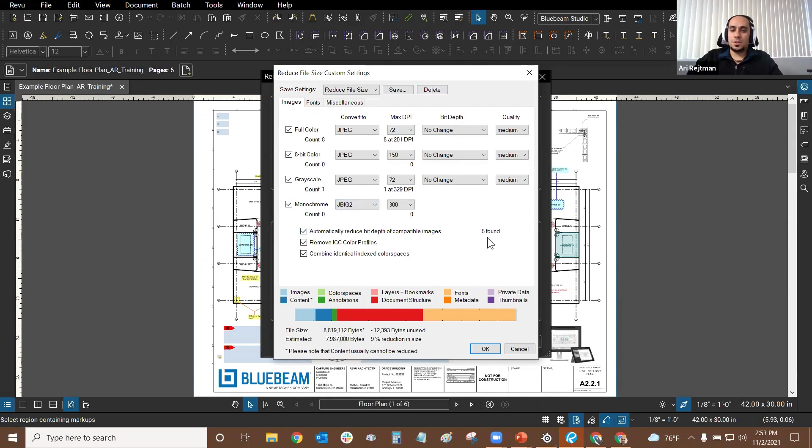Then we can go up here to fonts and we can drop some embedded fonts that may come from CAD or BIM. We can go to miscellaneous here and drop certain things—for example, if there are unused resources that are just some objects in the background of a PDF, you can get rid of them if you need to. If there are any external references, that might delete a lot of things, but if you're confident that the xrefs don't need to be there, you can drop them too.

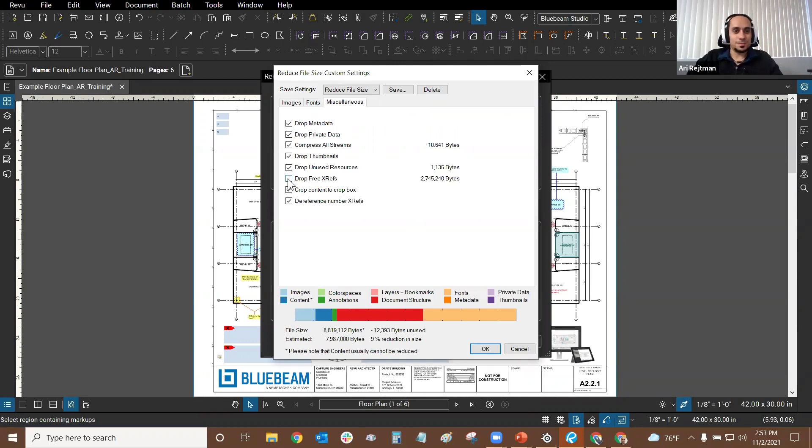And that's how you can reduce your file size, both with the reduce file size tab and by using wait for completion instead of iterative draw in preferences. Okay, great, that was an awesome question. So let's go back to questions—let's see, it looks like we have another question here.

When you flatten a document, does it remove security on the PDF? Does it allow you to mark up or overlay stuff? No. Flattening does not affect security, and sometimes you're not allowed to flatten a document if your security permissions are set in a certain way, because flattening is considered changing the document. So if somebody signed a document with security settings, or if they know how to work with the security settings before signing, like I showed you guys earlier, then they might do that. And if that's the case, then you're not even going to be able to flatten.

No, flattening will not override your security settings, they'll still stay in place, especially with flattened objects. I'll show you something else pretty cool that you can't do without the PDF content tools. I've trained almost everybody in my office, and these tools are very useful for them.

If you go to the edit dropdown and go to PDF content, we have these tools here, and you can actually get rid of stuff without having to go back into the original program and create a new PDF. So if I needed to quickly delete Open Office 200, I can just get rid of it.

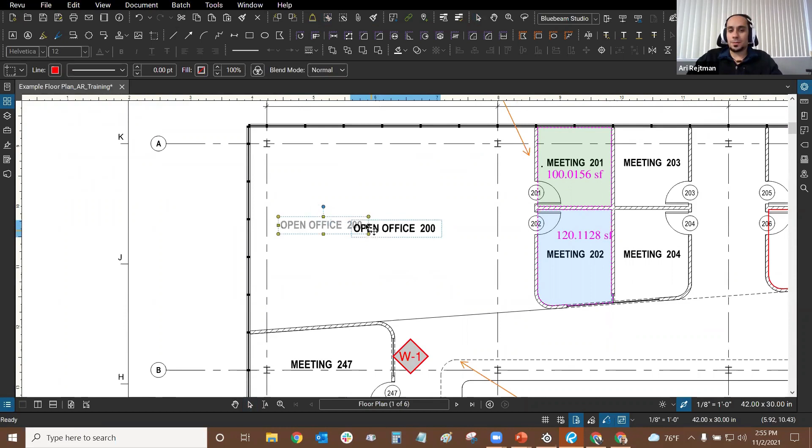It's gone. Because I used the cut tool instead of the delete tool, I can then just do Control V to paste, and now I just turned it into a markup that I can put back whenever I want. It's really quite useful. I'm just going to undo a couple times to get that back.

You're not even going to be able to use PDF content tools if the document is locked, and this is the only way to modify stuff that's flattened. So now you know that if something is flattened, it's not going to change the settings, and you might not even be able to cut, erase, or edit text.

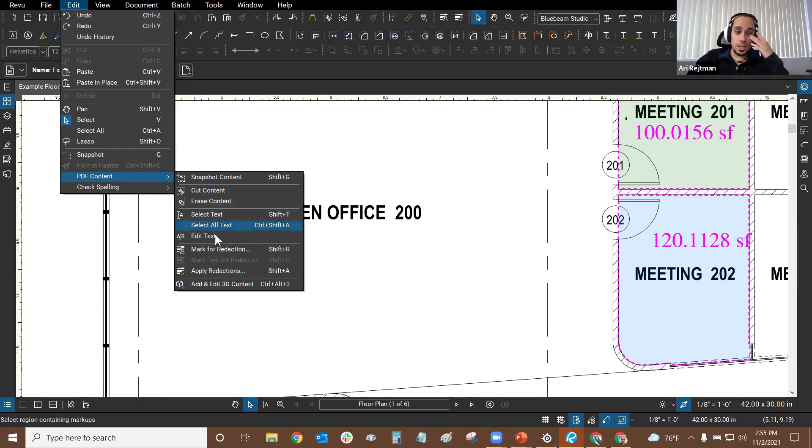Really useful stuff. I'll give you a sneak preview while we're here. If I use edit text, it scans my document for any vector data text, and then I can click on this text here and change this to Office 210.

Then I press the escape key and it's done. It kept the same font, the same color, everything. It's really nice. So I'll just press undo a couple times. There we go. All right, great.

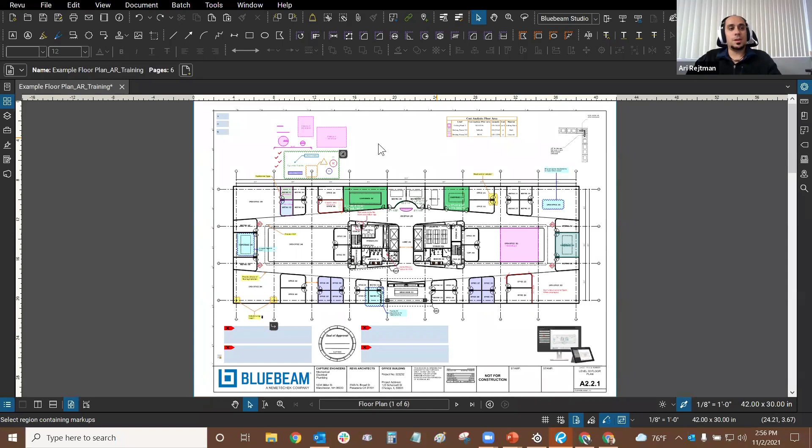So in our tool chest, I'm going to open up the tool chest right here. If I go to the tool chest dropdown and go to manage tool sets, I can modify a tool set by clicking on it and clicking modify. The option show in all profiles is here.

If you do this, you're not going to be able to really change your tools. You won't be able to add tools to the tool set easily. It will force you to uncheck this, and you're not going to be able to export your tools properly. So I don't recommend using this. I like to have my tools associated with my profile, and that's it.

When I switch profiles, I can have other tools associated with them. If I really needed to, I could copy my tools into a new tool set, or temporarily show them in all profiles if I need to for that day.

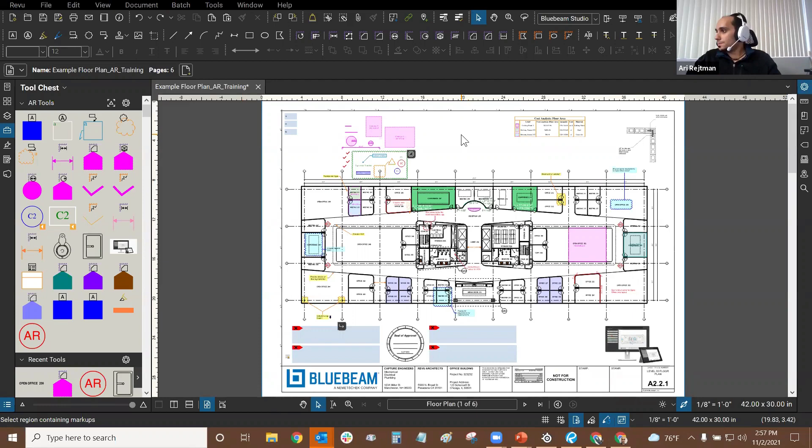So what you can do is, you need to basically tell them that when they sign—I'll pretend to sign here—you need to communicate to them to not just use digital signature, because if you try to separate the sheets after they use digital signature, you immediately invalidate everything and they have to sign again.

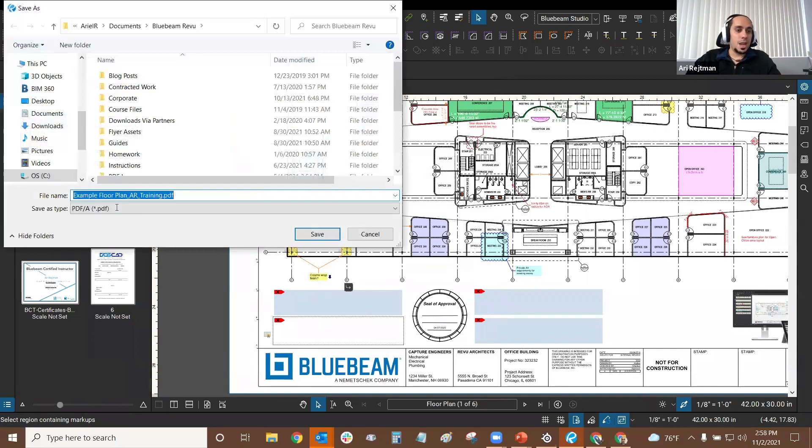Instead, if they use document certification and allow for markups, fill-in forms, and digital signatures, that should allow you to use the extract or export tool in thumbnails. Those tools are found by clicking on the thumbnails dropdown. We have extract, which is sometimes available, and if it's not, just use export. Archive is PDF-A—just click on that first, then switch your file type to PDF files instead of PDF-A, which is an archive tool.

So you can do it like that, and then you're making copies of the PDF, and on those copies you can put your comments and whatever, but those copies will not be signed. So you should be able to extract if they allow for markups and use document certification combined with their signature—that's probably the issue.

Pablo, if you want to reach out to us a little later, I can always work with you and your client to make sure you're sending validated files to each other and able to access them properly. We have a couple more questions since I saw there were a few things there.

Thank you, Carlos, for copying and pasting the Q&A stuff. So the overlay comparison doesn't work when plans are digitally signed—I have to extract them each time. Is there another way to perform overlay comparison for digitally signed plans?

If they're signed, and like I mentioned, if they're using proper security measures—basically if they have lax security and are allowing for markups—here I'll show you guys that list again. As long as you allow for markups, filling in forms, and digital signatures when signing, you can talk to your clients and see if they can change that setting, and you should be able to use the overlay comparison tools. If not, then yes, you must extract them each time. Sorry you're going through that, but that's the only way to circumvent it.

Signed files can be a bit odd. I see there's one more question: when you flatten a document, does it remove security? Oh yes, we already read that one. Perfect, okay, you moved that for me already. I think that's all of our questions.

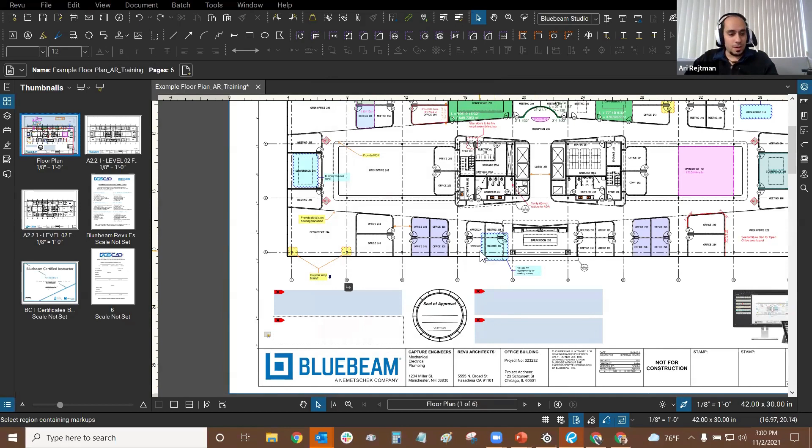Let me go back to our PowerPoint presentation. I just wanted to thank you all for coming here, I really appreciate it. This is week 1, so next week we'll have our second part, which focuses on quantity takeoffs, and the third week focuses on Bluebeam Studio along with submittals—signing, sealing, digital IDs. I'm going to cover all the important stuff then.